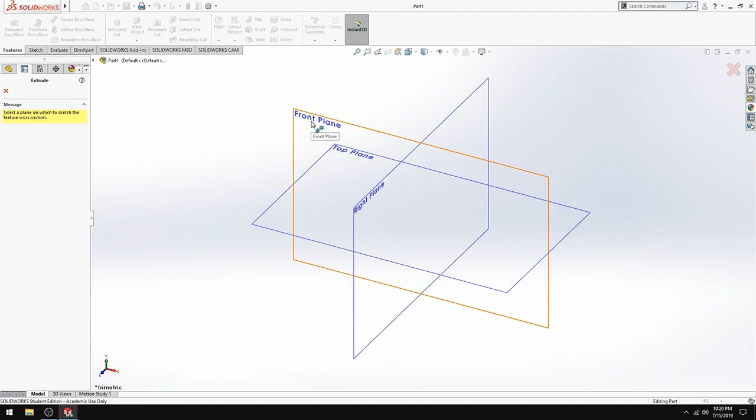And then we're going to start by extruding. We're going to extrude a square. We're going to make a square on the front plane, so go to the corner rectangle, go down to the origin, drag it up.

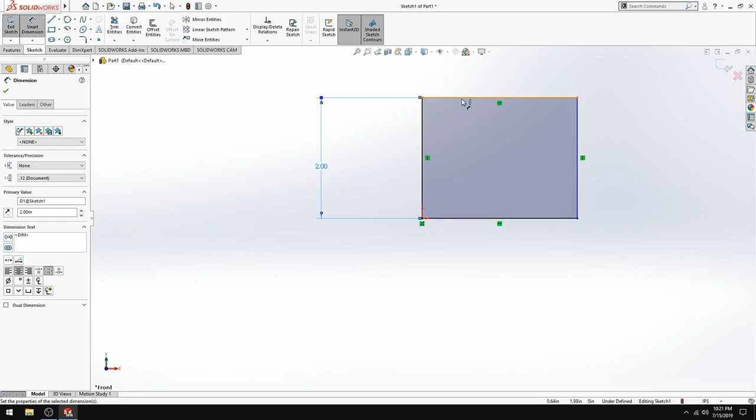Then we're going to smart dimension it out, and we'll make it 2 by 2. And we're gonna extrude it out, so exit sketch, and that'll bring up the 3D feature, extruding.

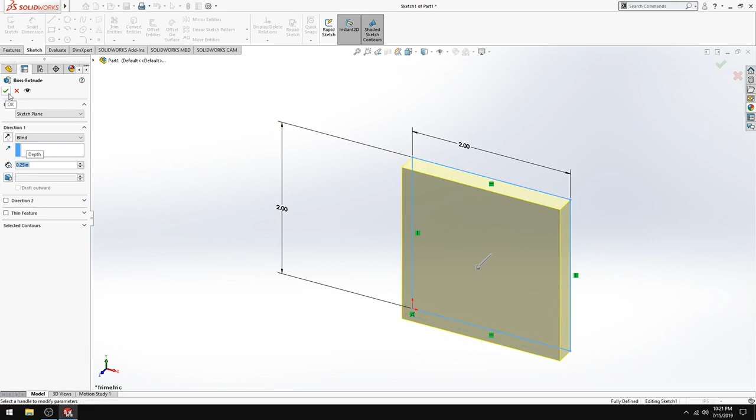And we're gonna change that depth to 1/4 of an inch, so 0.25, enter. And then check it off, and we'll have a regular square, and that's what we're gonna put our image on.

So the next thing is find your own image, and you're gonna be tracing over it. We can try a guitar, anything you want. How about this one?

So once you have a guitar, you're going to save the image. Right click on the image, save image as, and save it in a spot. I save a lot of stuff to the desktop. It's not recommended if you have folders on a network, but just for easy access. Name it guitar, and it'll be a JPEG image. So I'm going to save it.

Go back into SolidWorks. You should have seen the image, and there it is on your desktop. Go back into SolidWorks. We're gonna copy the image to this face.

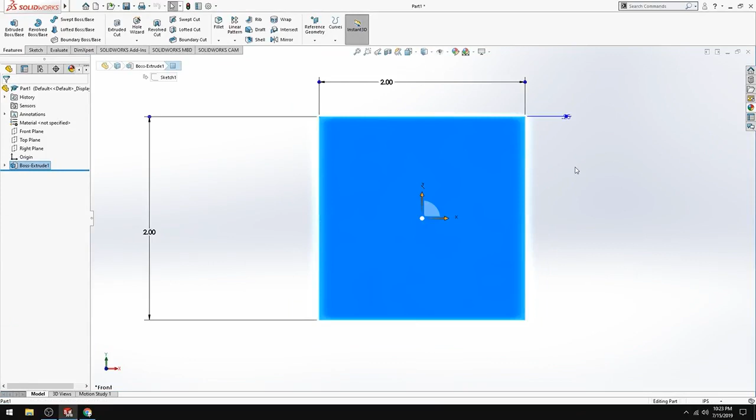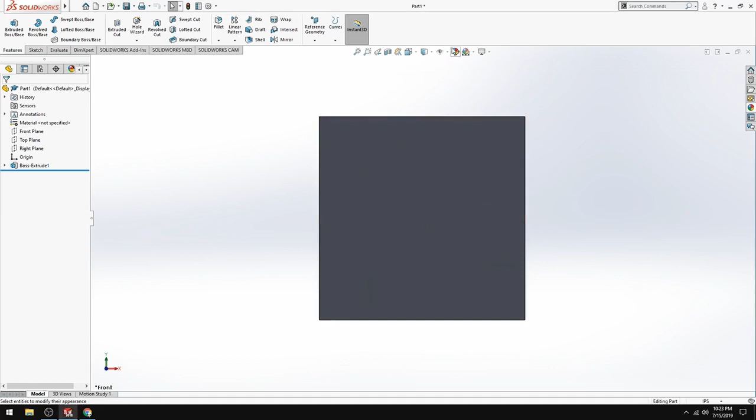So you're gonna click on the face, and then appearances. Sorry about that. So edit appearances, click edit appearances up here, and then you're gonna click this face. We don't want the whole part, so click this face and then click the front face.

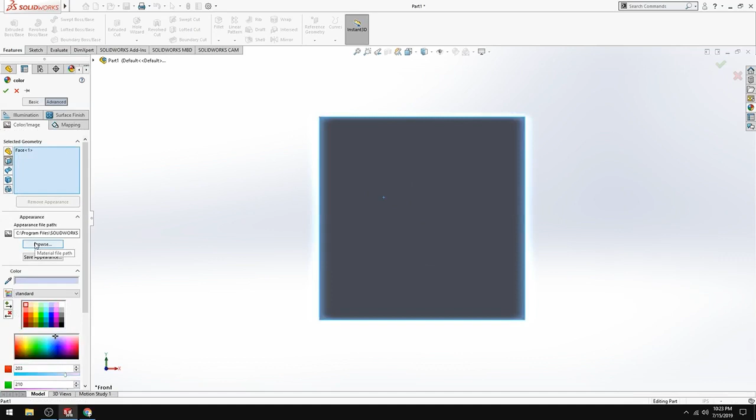Go into advanced and browse, and you're gonna go to the desktop, and you have to search for the different file, so go into all files, and guitar should pop up.

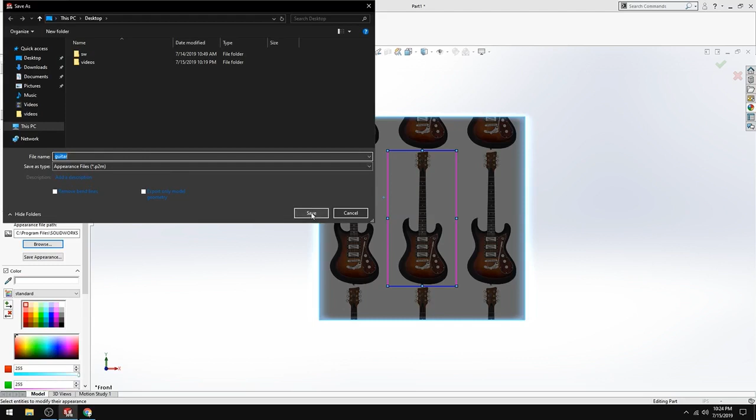You're going to open that, and then it's going to have you save it as a SolidWorks P2M appearance, and that's okay, so just save it.

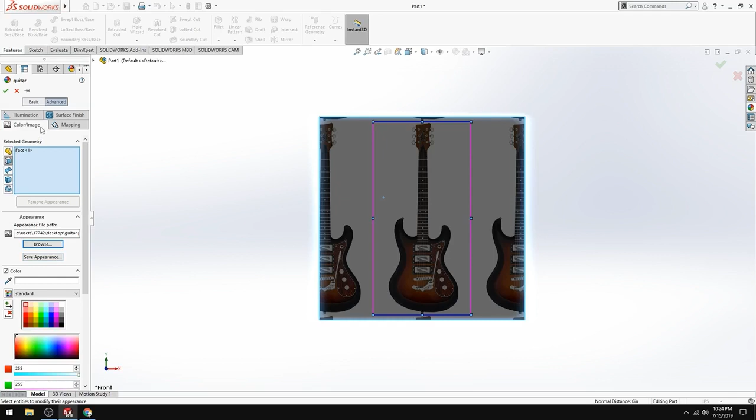And now you want to make this guitar bigger, so out here, when it has the arrows all around, you're gonna click and then zoom in. So zoom in like that, and check it off. So now you have your image.

Now we're just going to trace over it. If you don't have really straight lines and you have a lot of bends to your lines, you're gonna want to use a spline.

But the first thing we're gonna do is I only want the guitar, I don't want this entire square. So I'm gonna trace over the guitar with a spline, and then I'm gonna cut it out.

Extrude cut, and I'm gonna click the plane I want to cut from. So I click the front, and then I'm just gonna trace with my spline.

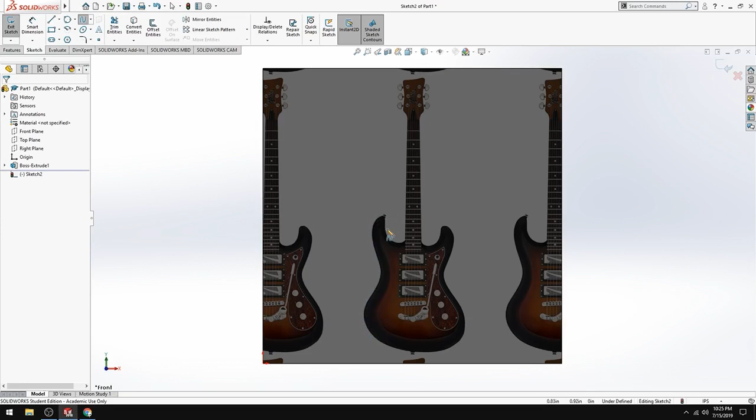Now the more points, the more bend it has, and you can zoom in. Looks like an electric guitar. And I'm just going to trace it. It doesn't have to be exact.

So if I don't want this down here, I don't have to have it. But if I get the overall shape how I want it - notice I'm not going too far with the spline, because otherwise I won't be able to curve it in a way that I want. Just far enough.

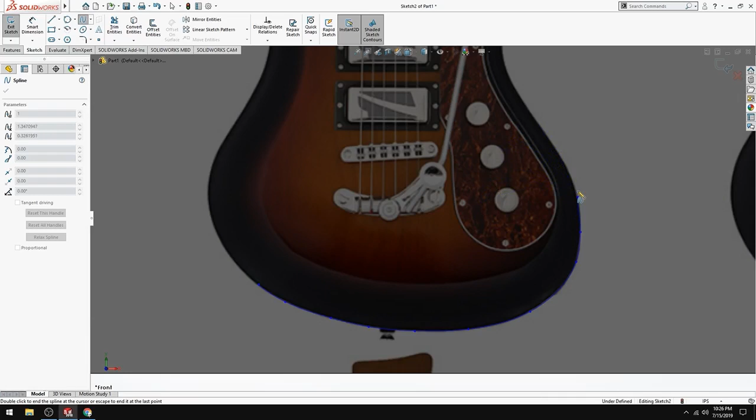Zooming in and zooming out. Feel free to fast forward through this.

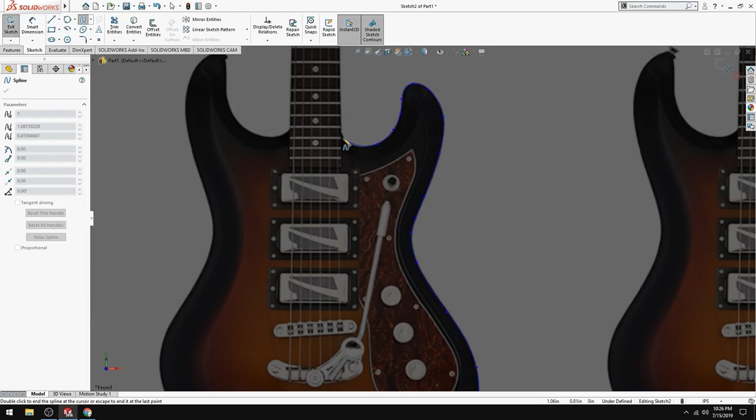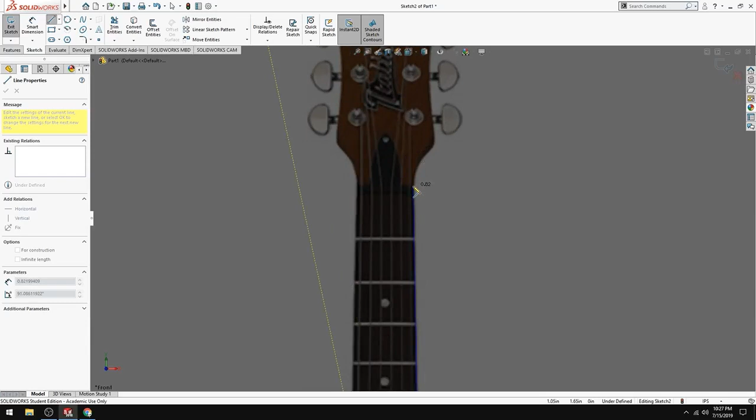Since this is a relatively straight line here, I'm going to use a straight line. And I'm going to go from here to about there. And then I'm going to pick up my curve again with the spline.

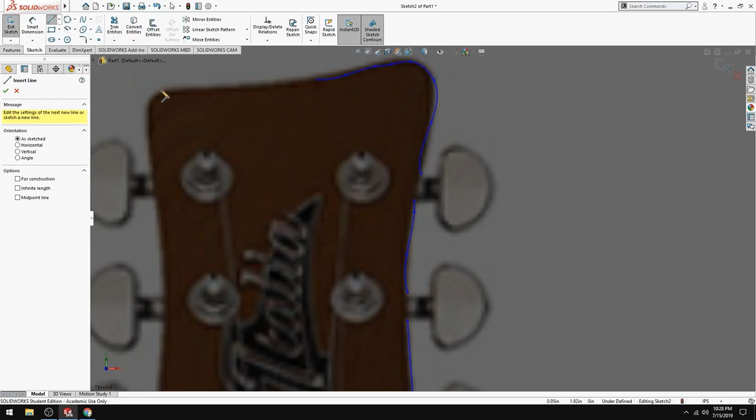Kind of going back and forth between straight lines and curves with the spline. That looks a little funky, get rid of that.

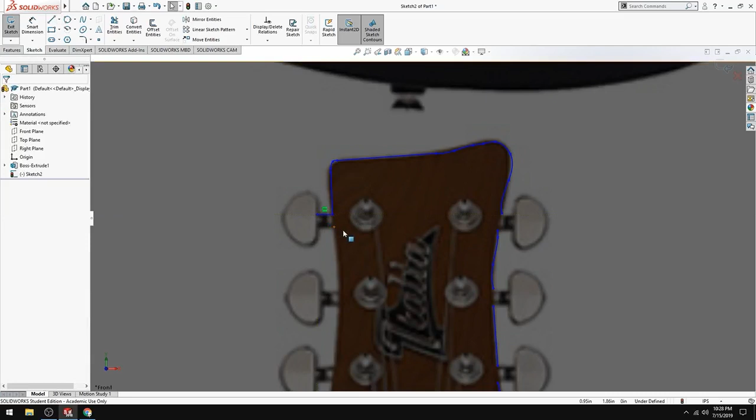And notice I'm not crossing over any of the lines.

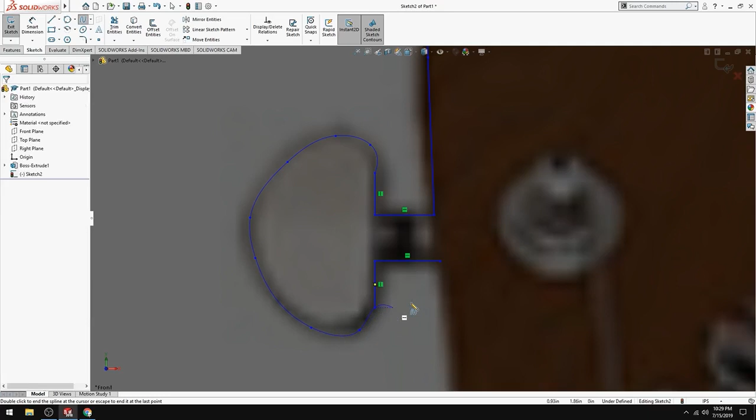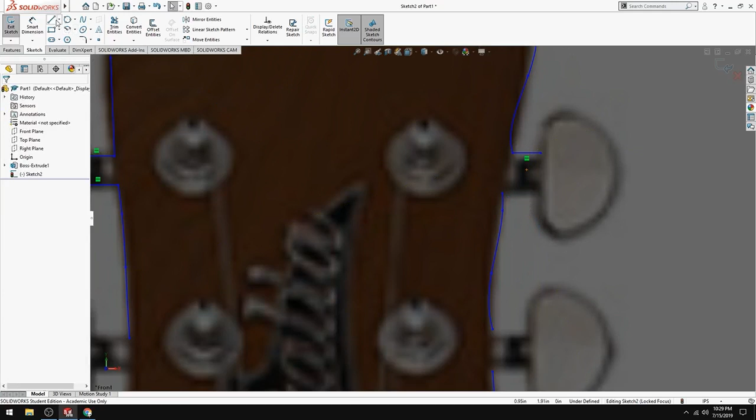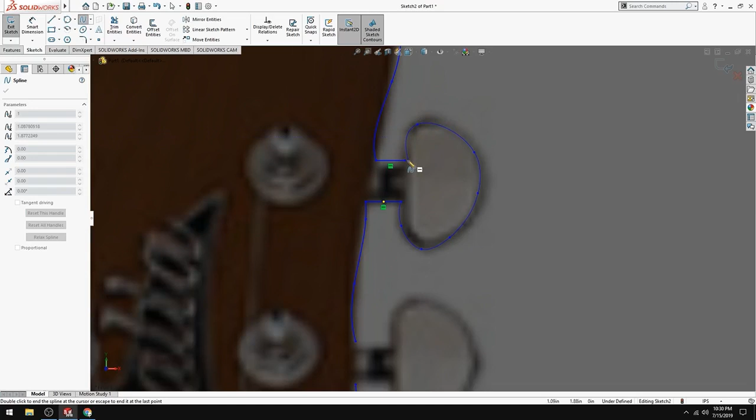And it doesn't have to be perfect. If you didn't want these tuners, no one's making you put them in. It's up to you, your artistic discretion.

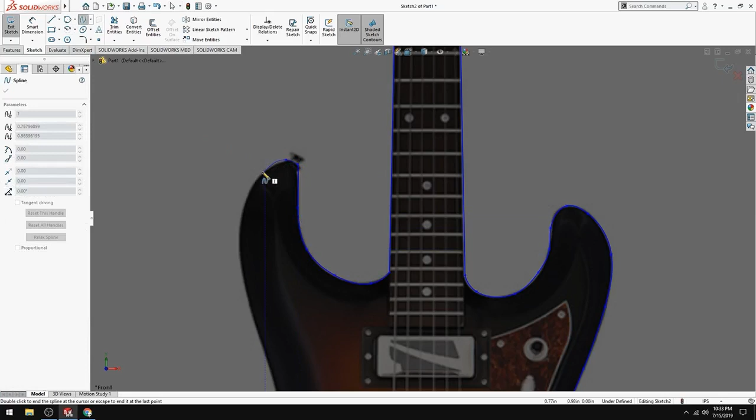Doesn't have to be perfect, just going around. It's not exactly on the line, but it's not gonna do anything.

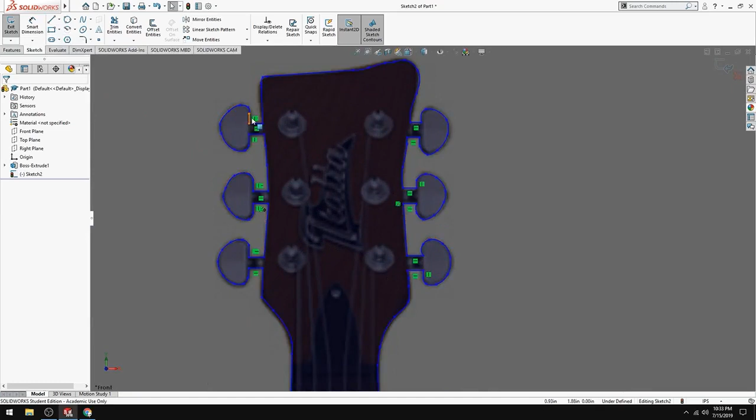Connect all the dots. For some of you that have more intricate designs, you may cross over in sections, and Solidworks won't recognize it as a shape. So if you have something overlapping, it's not going to know it's a shape, and you're not going to have this shaded in color.

Once you have the shaded in color, I want to cut out everything around this guitar and just leave the guitar, and then put in more detail with the guitar.

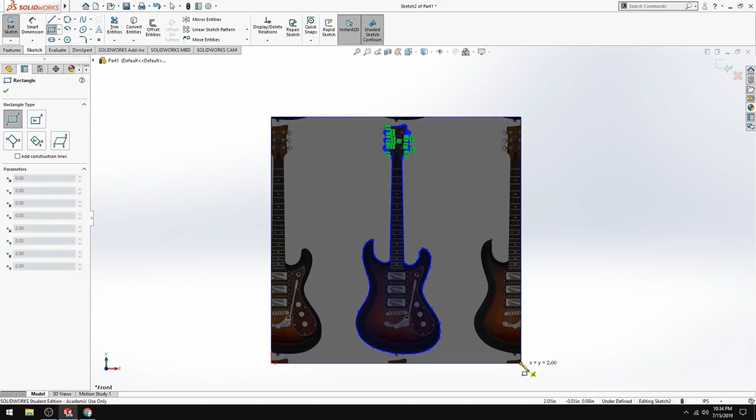To do that, I need to create a square while I'm still in this sketch, around the box. Okay, so I created the square. Now I have a sketch within a sketch, a shape within a shape.

So when I hit exit sketch, it's not going to know what I want to cut away. So I'm going to select the contour, the contour outside, and 0.25 is the thickness of my original box. So if I make it a little bit less,

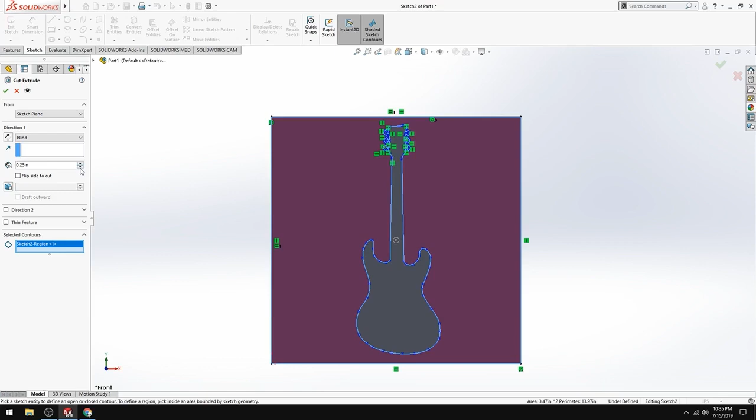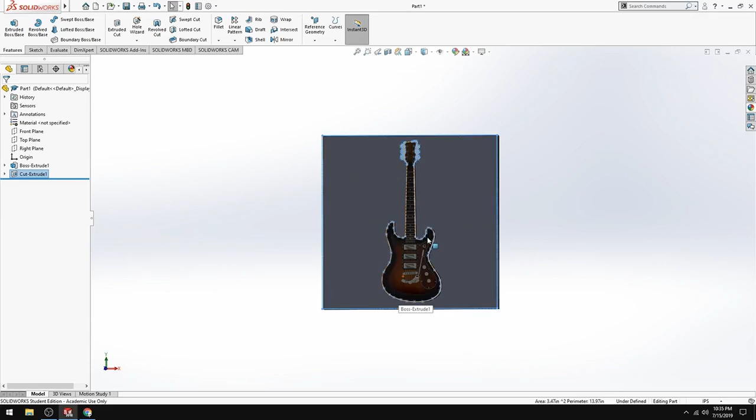by 1/10, it's going to cut almost all the way through, but not all the way through. So I'll try that. Now it's kind of like a platform - I have my guitar standing on a platform, and now I'm going to put in more detail.

The more detail you put in, the better it's going to come out, and the more colors you can add to it. Right now you could only really introduce a couple colors because you have two layers, so you're going to be making layers with each cut.

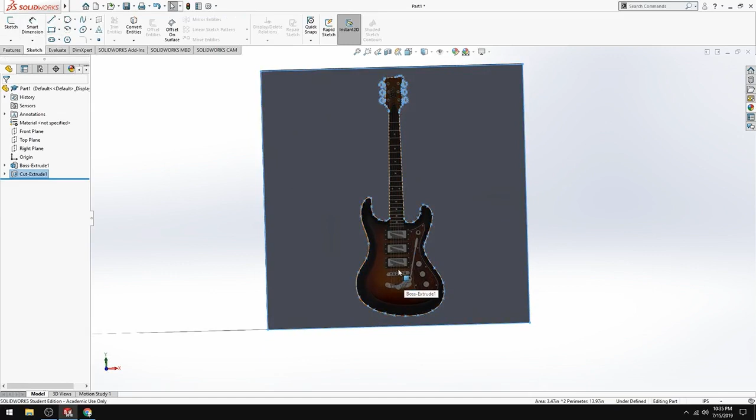To make some more colors, or more layers, maybe I'll do the hardware - meaning the metallic stuff. So these are where the different frets are, and the knobs, the control knobs. I'm going to cut those in.

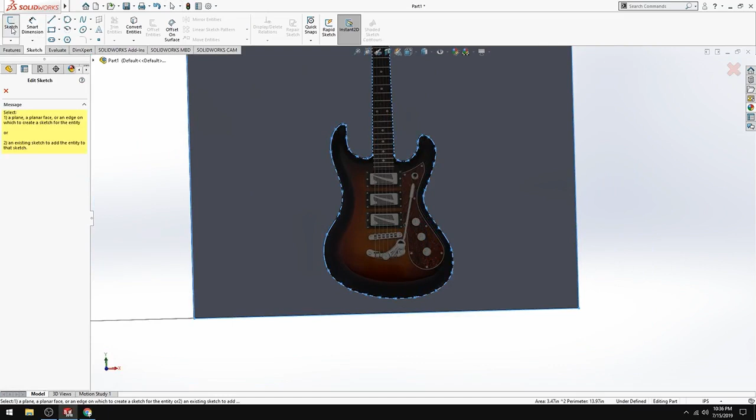I'm going to open up my sketch and click in here, and start to make some of these different hardware items. So center it about right. And again, it doesn't have to be perfect - people are going to get the idea of what it is.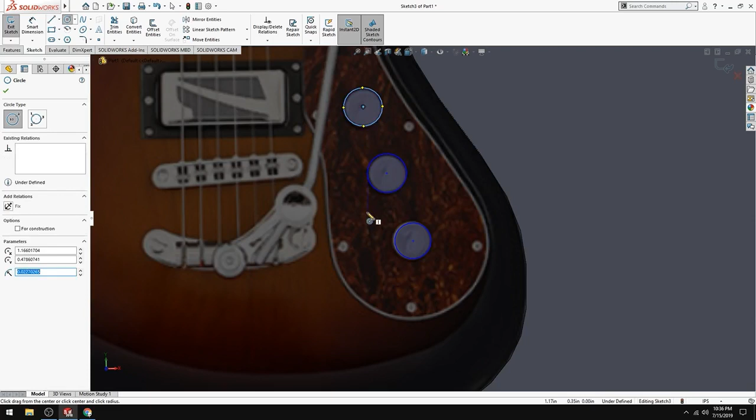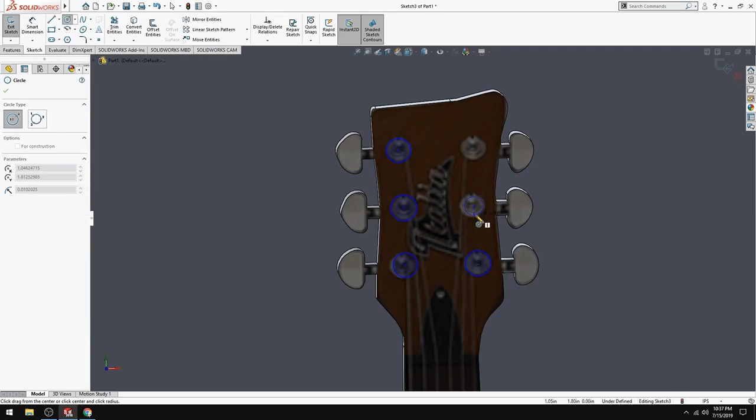Okay, leave these guys up here. I'm trying to center them about. The more sketches you have, the more detailed it's going to come out.

So I'll make these boxes here. That looks like a slot, so I'm going to use straight slot. But it's crooked a little bit.

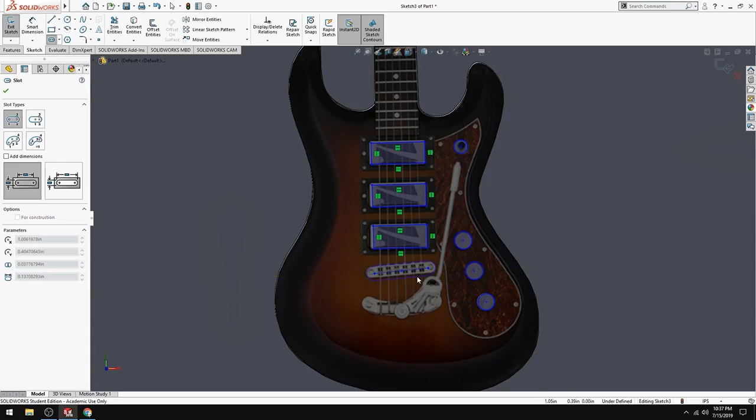Put this point and this point, like that. And then I can trace this bottom piece - I'll use a spline for that.

Quick Control Z is always your back pedal if you need to undo something you did. Control Z - it's actually that for a lot of different programs, not just Solidworks. A hotkey, that's what they call it.

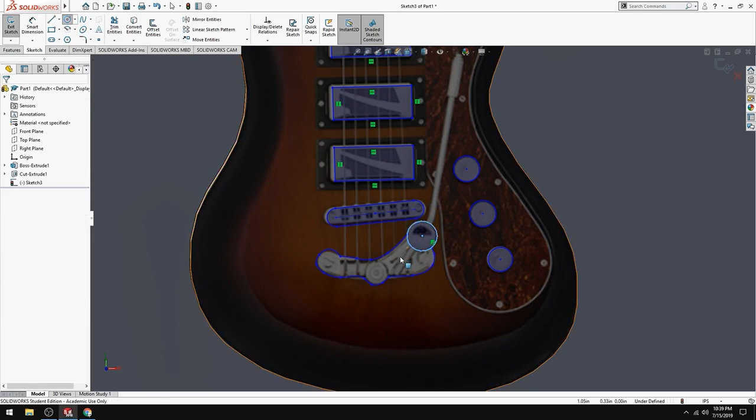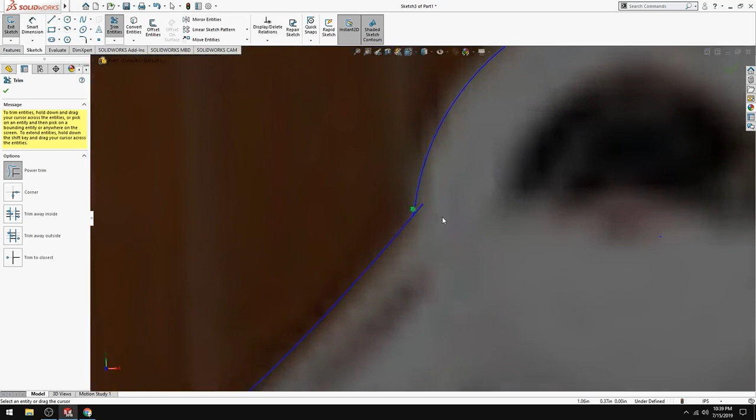Since this is overlapping, I'm going to have to trim it. To trim, go to the scissors icon, then power trim, and just draw a line where you want it to trim. I want to trim this arc right here, so I'll draw a line through it, and notice this needs to be trimmed too because it's overlapping. So I'm going to trim that, and then it's shaded, so that's something I can cut out. So I'm going to put this rod in.

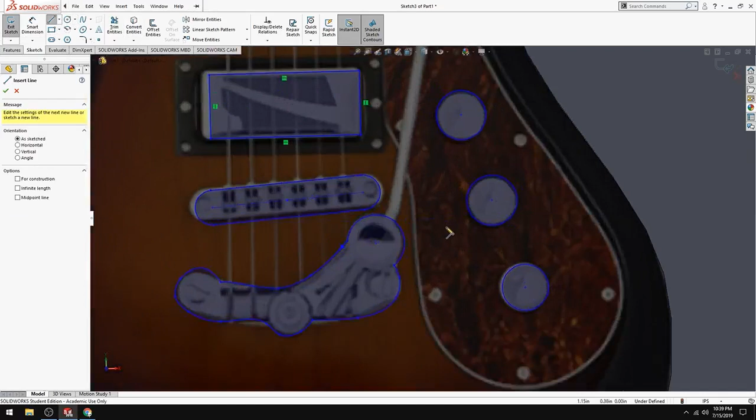It looks pretty straight, I'll put it there. Again, you don't have to be perfect, so I'm just going to put it without this extension here, and I'm just going to make it a square.

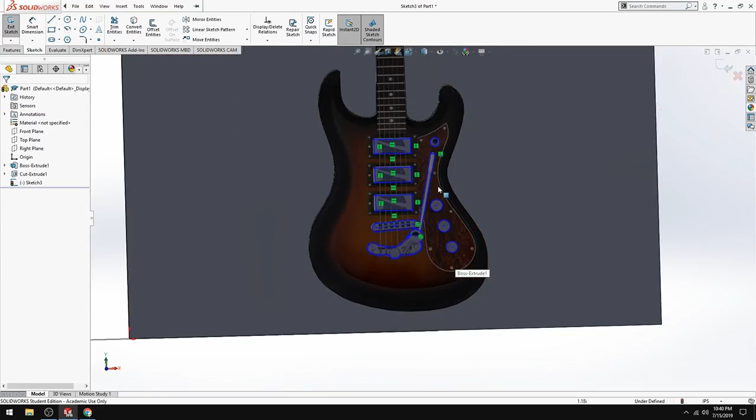It's your piece. It's nobody else's, so you can do what you want with it.

Trim entities again, I have the power trim on, so notice I need to get rid of this. So now it's one whole piece, and I can extrude it up, or I can cut it. I'm going to cut these in, like I did with the other piece.

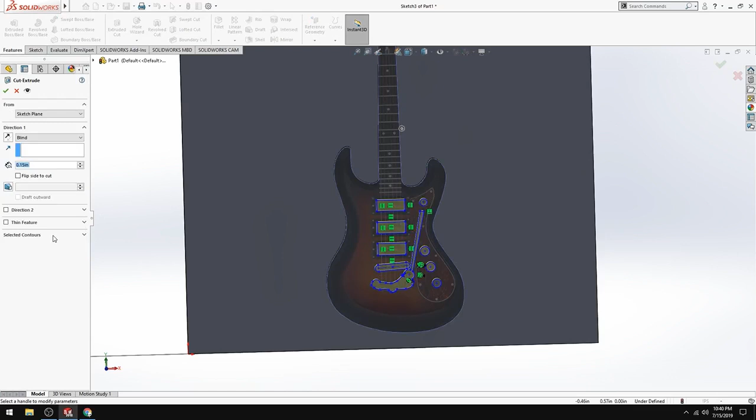So I'm going to go into Features and Extrude Cut, and I'm going to go into Selected Contours, and select all of these pieces that I just created.

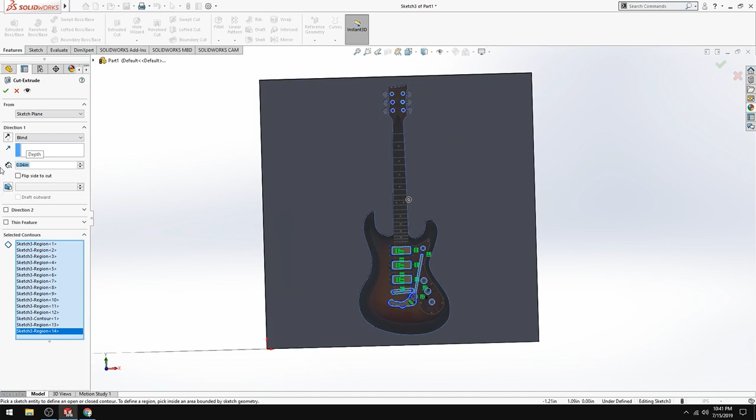With the powder printer, it rolls out in layers of 0.02 inches. So 0.02 inches will show up, but you can go deeper - obviously not too deep because it's only a quarter inch wide. So I'm going to put this one at 0.04, a couple layers in, and that'll be deep enough to show up on the powder printer.

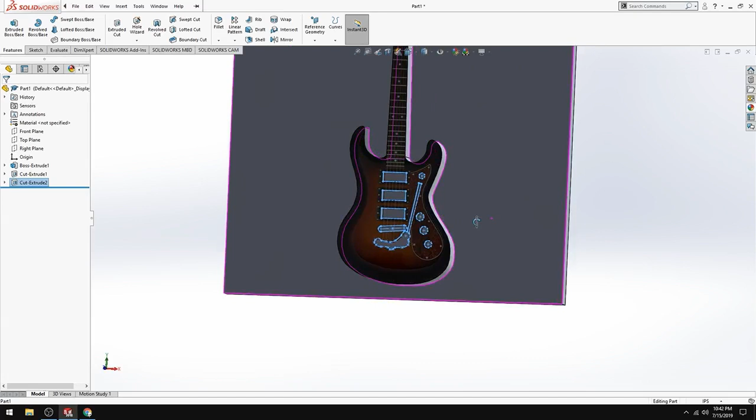Once you have your cuts, right, see how these are cut in. Once you have it, it looks like a guitar to you. So I'm just going to put in a couple more lines or something, if I wanted to print this out.

But just for showing purposes, I'm going to start coloring it, and I'll show you what's going to come out. So right now you see color on the image, but the printer won't recognize that color. In order for the printer to recognize the color, you actually have to put it in.

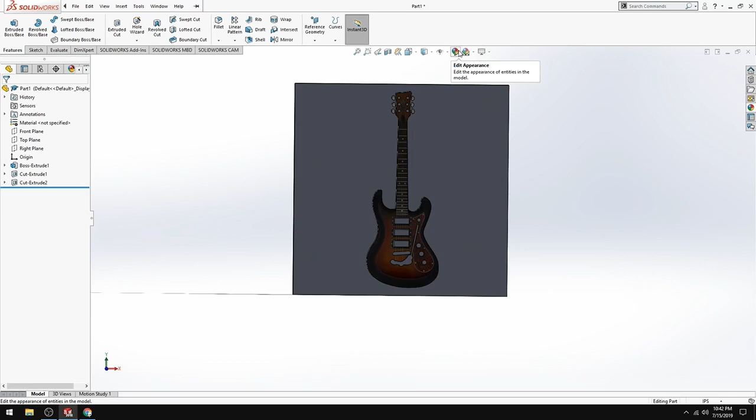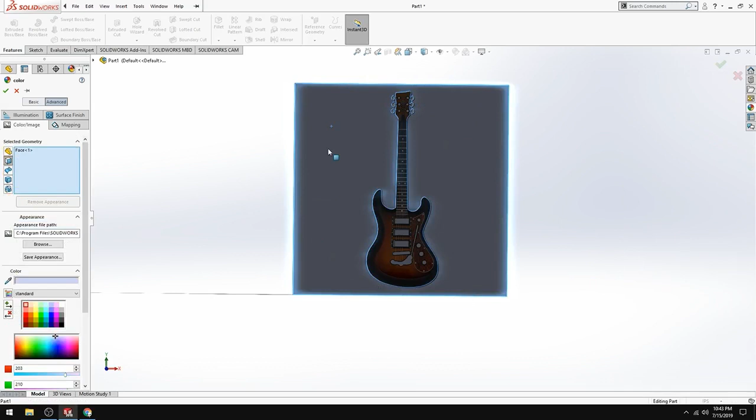So you're going to go to Edit Appearances, and then get rid of the solid part because that's the entire thing. These are the selected geometries that you want to do. If you choose a face, that's just like the face of an object. So if you choose a face like this, all the outside, say you want that one color, you can click that, and let's say we want it red, and check it off. Now that will print out red, but this guitar won't print out in any color because you haven't colored it anything, so we're going to introduce color to the guitar.

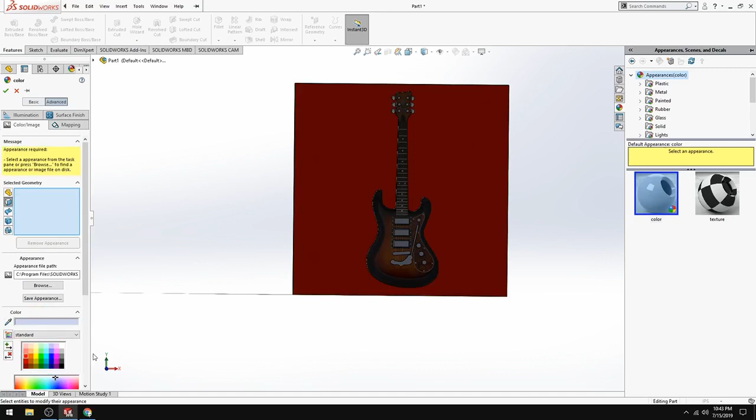So I'm going to click into Appearance again, get rid of this solid part - it automatically prompts that, but we don't want it because that colors the entire part and you don't want that. So I'm going to select the face of the guitar, and we're going to make that green, or how about orange?

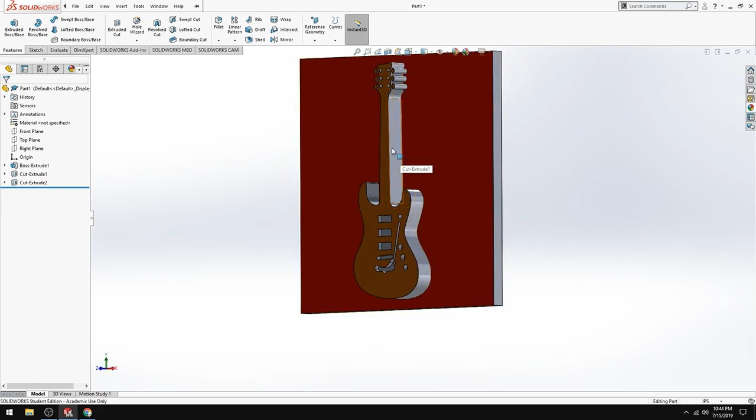So now you have an orange guitar with a red background. If you wanted to color the outside, you can do that. So go into Edit Appearance, get rid of this, faces, and you can select all the faces that you want to add color.

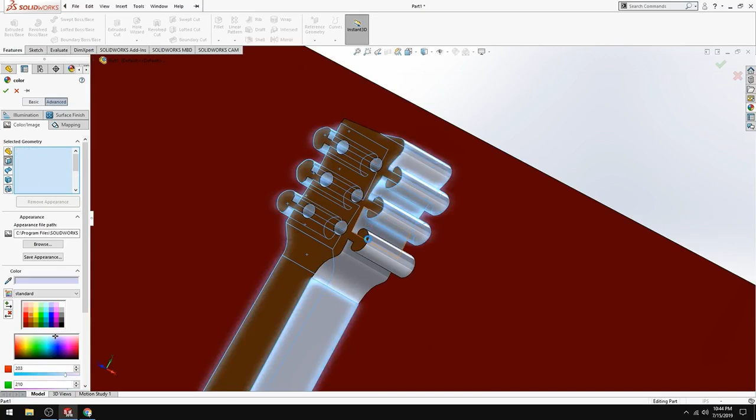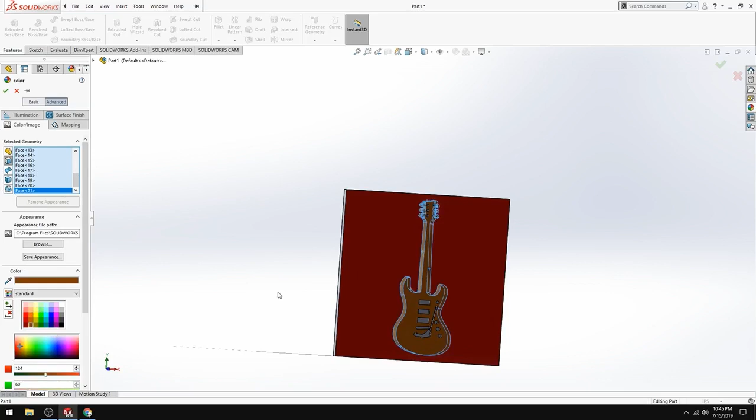Okay, and maybe I'll make that a deeper orange, almost a brown, so it'll add a little depth to it. And let's color the inserts.

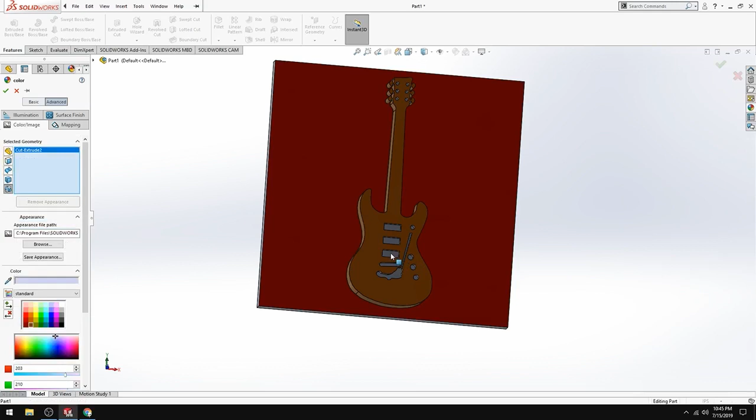So edit appearance. Now, since we did all of these cuts in one geometry, in one function, you can go to Features, Selected Features, and once you select this feature, it's going to select all of it because we cut that all in one shot. So if we select the Extrude Cut feature, it's going to color everything in there. Now, if you wanted to color things individually, you would go to the face function, select the face geometry, and select individual things. So maybe I want - we'll do a gray.

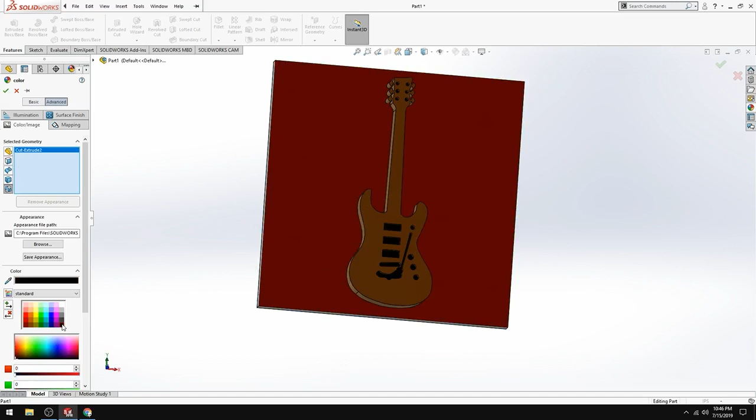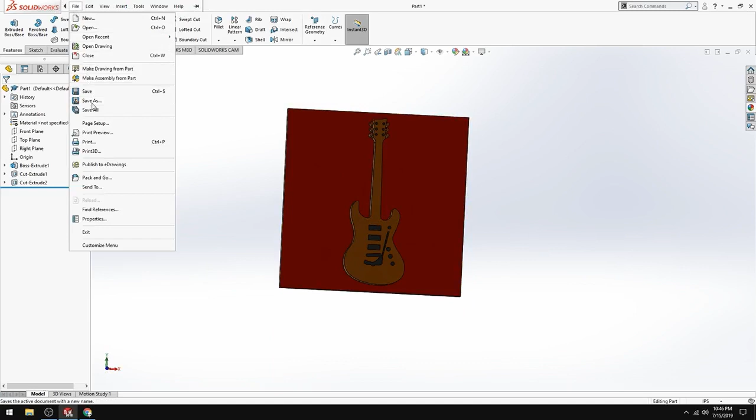All right, so let's say I wanted to print this out. We're going to save - I should have saved it before. So save as guitar for the part.

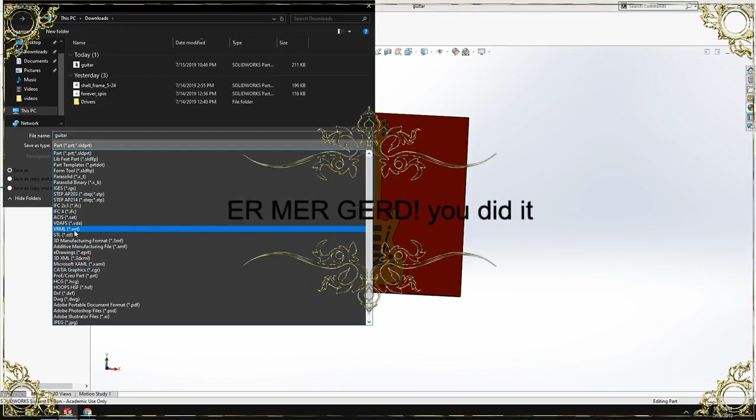And then for the powder printer to recognize it, you actually have to save it as a VRML, and you would just save it as guitar, and that would be how the powder printer would pick it up. And yeah, that's a basic guide for creating, taking an image and creating something 3D out of it.